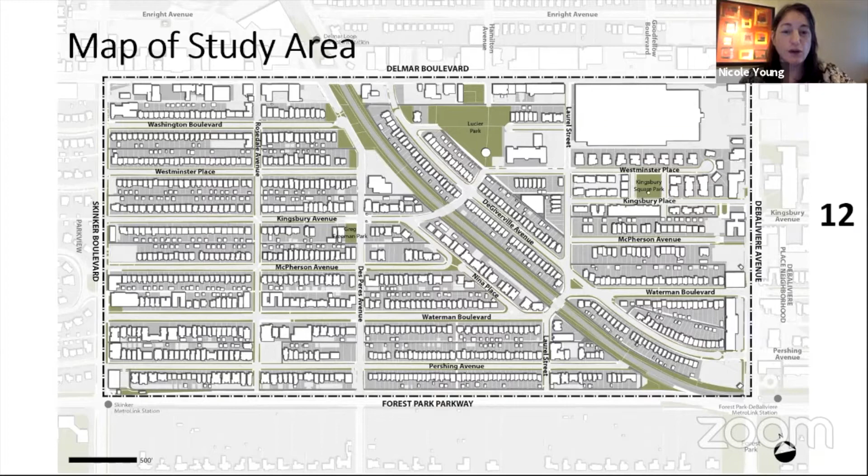As Mike said, there were over 400 comments, so on the next slide we can show you how those were distributed. It's so great that we got so many comments. You'll start to see pictures of the neighborhood as the presentation goes on. Our team here today really spent quite a bit of time walking through the neighborhood, getting to understand it, and really getting a feeling of how things are functioning on a day-to-day basis.

So Mike, do you want to go ahead and start talking about these maps we've prepared? Sure. Taking all those comments, over 400 distributed across the neighborhood, we started to look at where we had those hot spots and where issues started rising to the top. The first thing we looked at was safety and mobility — that's number one. And what really rises to the top is along Waterman Boulevard.

That is definitely a corridor that has a lot of speeding issues. This is also where we have multiple four-way stop signs, controlled intersections, and we definitely have a lack of compliance at those. The other big route is DeBaliviere Avenue going north and south through the neighborhood — it's a very wide street, and it lends itself to speeding, and that's typically what happens.

We definitely see that. Some of the other issues relate to how certain one-way streets and street closures are configured — based on the comments we received, people get in there and maybe get lost, not knowing which way to get out of the neighborhood, and will either go the wrong way on a street. When they do that, unfortunately, they try to get out as fast as they can, which leads them to speed to get out. So we end up with some speeding issues on those one-way streets because of that.

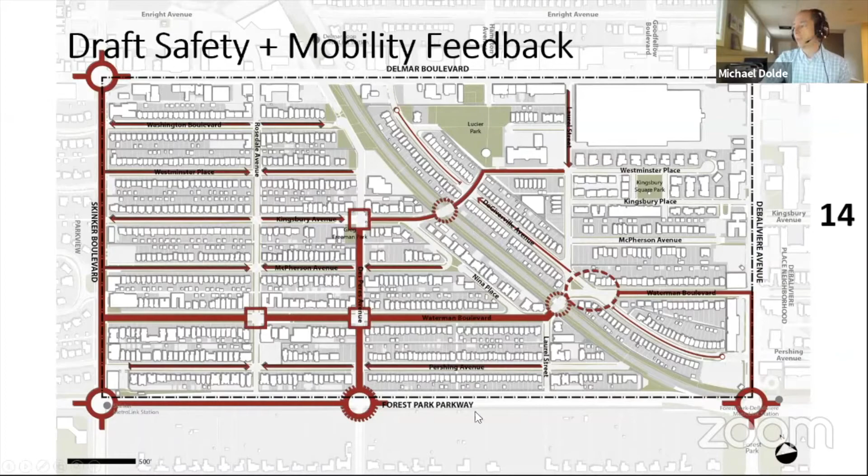So we all went out and walked the neighborhood, took these comments, and wanted to verify them and observe it for ourselves. They were almost all spot on.

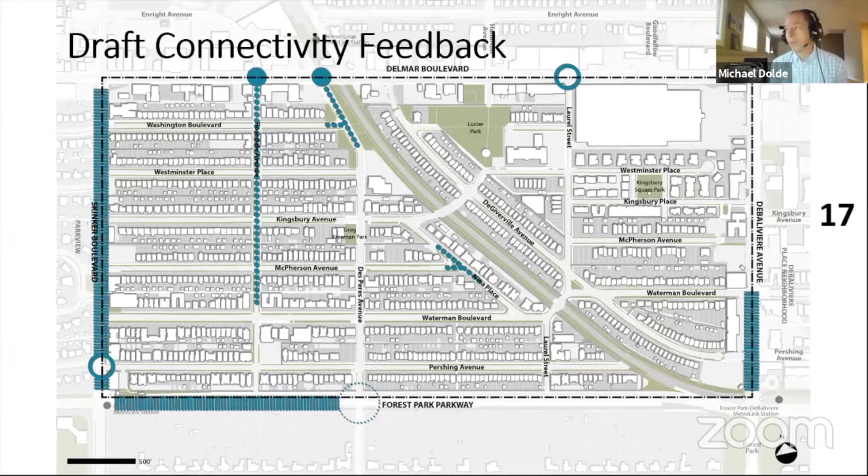One of the other things that rose to the top in the comments - and this is something we didn't actually ask for in the Metroquest survey, but people volunteered the information - was about the connectivity of some of the streets that had been closed in the past. It's something we're going to discuss a little later in the presentation, but most of it revolved around the streets across Rosedale that are currently closed for through traffic. Then there's a few other locations where either we don't have access out to Delmar, or we have some one-way streets that prevent connectivity to either side of the neighborhood.

We did ask about parking and loading. We didn't have as many comments as we expected when it came to parking and loading, but we did have some specific locations. This tended to be more down on the southern portion along Pershing. Some of this is due to the retail at Skinker and Forest Park, and also it's closer to Washington University, so you get some of those day parkers. Some people may not be parking on campus and may come over here to park on the street, and we end up with some specific issues on those streets when it comes to parking.

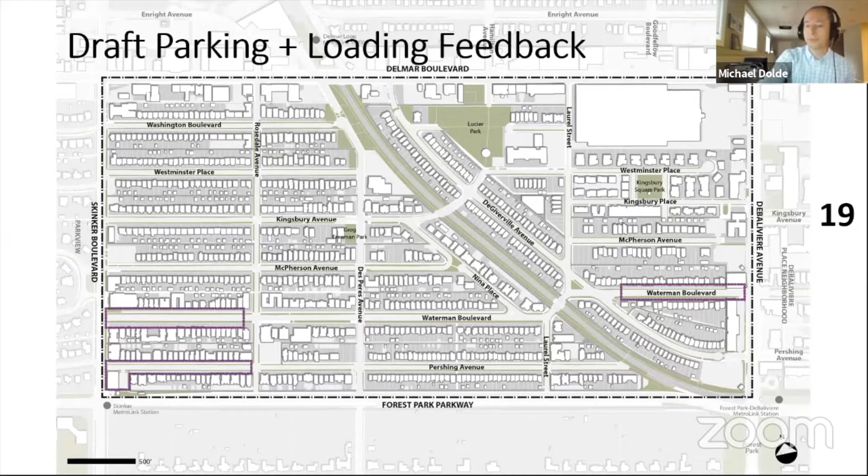We also have some issues with lighting. Some areas either have lighting that may be blocked, or we don't have pedestrian scale lighting for people walking. So it might be good if you're driving in a car, but if you're walking, you may not have well lit intersections to feel safe crossing, or even from a personal security standpoint.

So starting to put all this together, we're starting to come up with some composite maps of what the existing issues are, and kind of overlaying that on top of each other to see where we can have opportunities.

Nicole: So now we're going to talk through some of the safety enhancements that we're considering for the neighborhood. There's a few categories of this. Most of these photos that you'll see in the next few slides are from other projects that have been implemented in the city of St. Louis. Each of the photos is associated with an address. We're really going to encourage you all to go out and see some of these after the presentation. And if you'd like to come back and give additional feedback through the Mentimeter, you're welcome to. We will have this on the website so you can come back and look at the addresses for each of these.

So we'll start off here with the intersection enhancements. The first one - Mike, if you can go to the next slide.

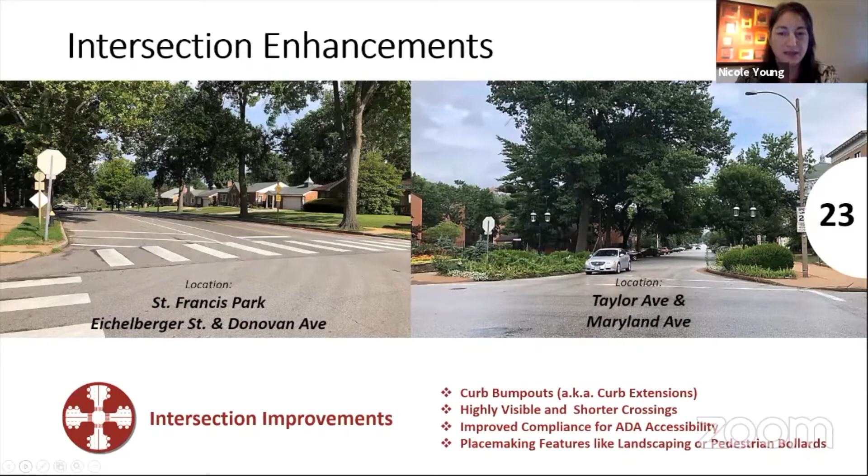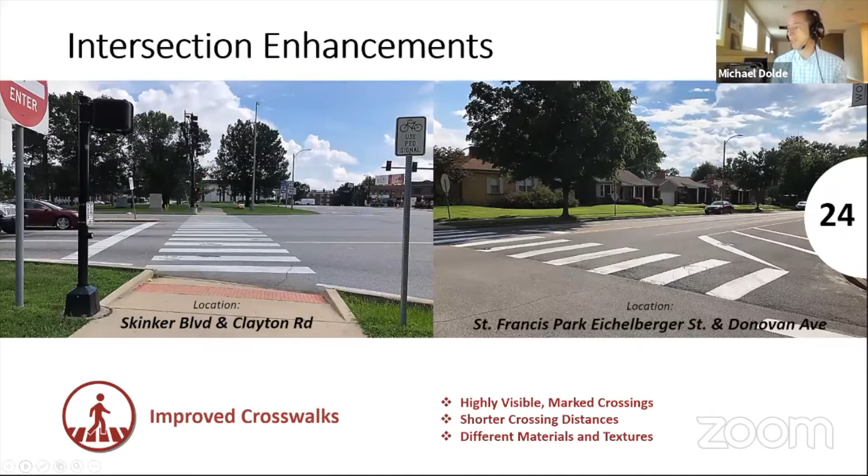So more of a neighborhood feel, but using that same type of striping. More intersection enhancements with improved lighting in the Shaw neighborhood, and also in Central West End. You'll see some of the different style of lighting that can provide more of a neighborhood feeling.

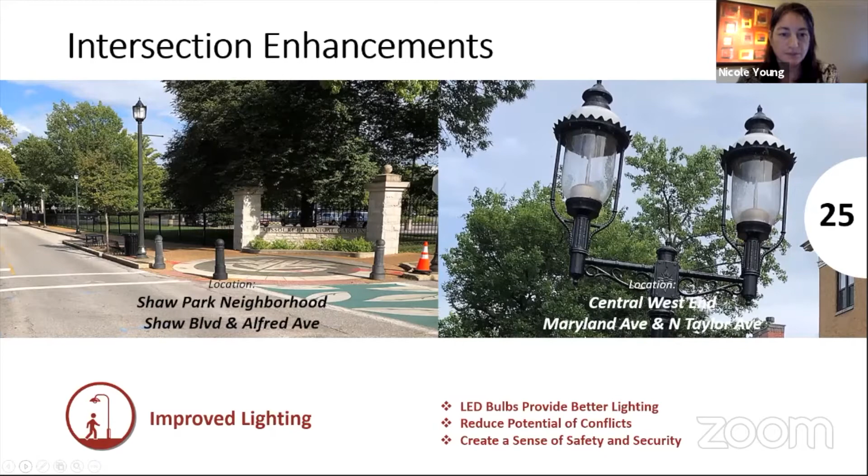As we move into the next segment, we call these mid-block enhancements. On the left here, you'll see a mid-block crossing that's located in Forest Park. That allows us to give the neighborhood more access points to cross the streets, helps to slow traffic, and really allows for a more controlled speed between the intersections.

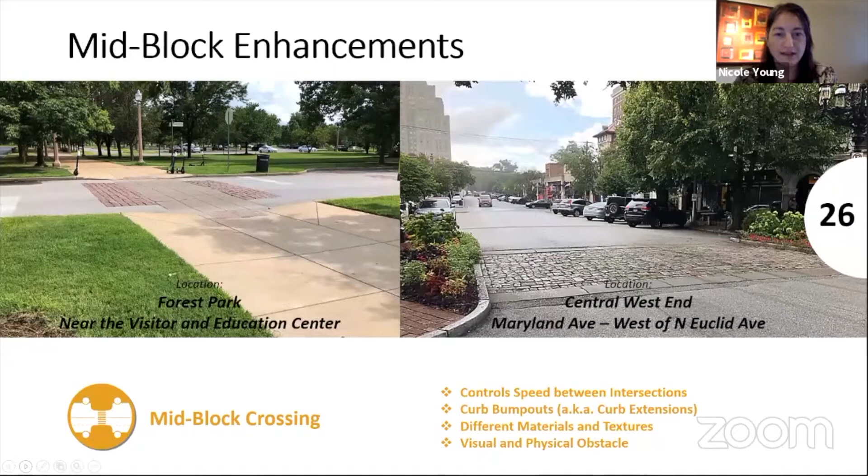On the right here, you'll see one that's in the Central West End. I think a lot of people know this location, just at Maryland and Euclid. Again, it provides a different material and texture, and provides a little more visual aesthetic to the crossing itself.

Sorry, I think my feed is running a little slow here, but a couple more photos in Tower Grove. The left one is on Connecticut, just west of Grand. The right photo here is Tower Grove South at Oletha at Lucy Street. These are both speed humps.

We know there have been a lot of questions about speed bumps versus speed humps in St. Louis. We are not allowed to have speed bumps because of the snow plows, so we really try to utilize these speed humps that have a wider profile to control speed between the intersections. It just provides that obstacle to reduce speeds and gives the visual cue to drivers to slow down.

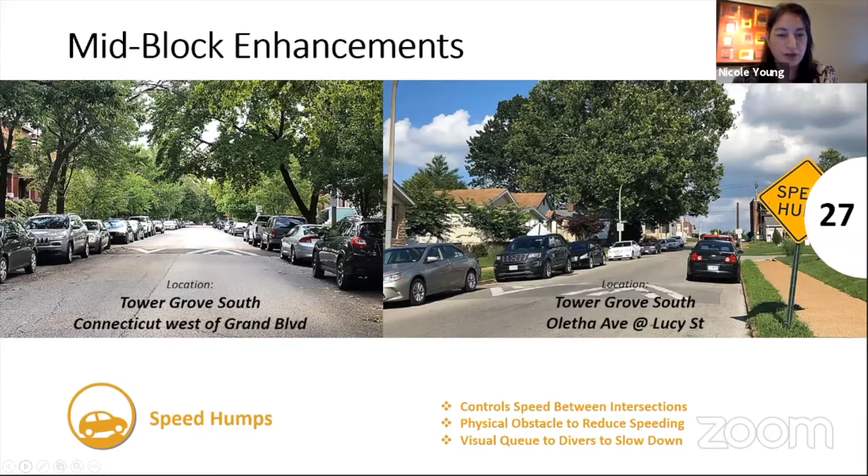I know the word road diet tends to frighten some people, but really what we've seen in providing some road diets in St. Louis is that it doesn't impede the flow of traffic, but does improve the safety quite a bit. It slows cars down, but allows them to get through the intersection faster, actually, by narrowing those lanes of travel, and it actually shortens the crossing.

So it additionally helps to prioritize other modes of traffic, such as pedestrians and bikes. Mike, did you want to talk about that a little bit more?

Sure. By having the curbs brought in, when we say road diet, it's a narrower road, especially at intersections, and that makes the crosswalk shorter. So that's less exposure for someone that's crossing the street. It would take less time for them to cross, it's less distance, and it allows us to have more of a highly visible crosswalk. It's a visual cue—as you come to an intersection, if it's narrowed, you're more likely to see visually that it is an intersection and that you do have crosswalks.

So as Nicole mentioned, it's safer all around, but definitely for pedestrians with that shorter crossing, that's less exposure out in the middle of a street, especially for your most vulnerable users—your kids and elderly and anybody that just takes a little bit longer to get across.

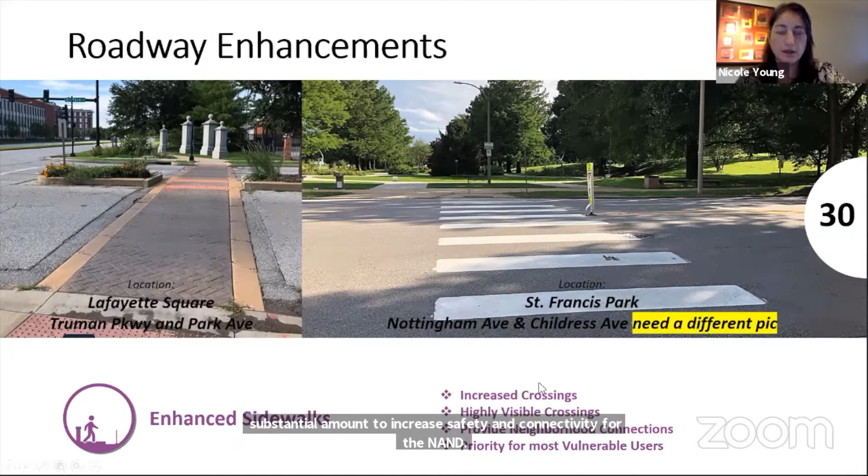These are just a couple, one shown in Lafayette Square and the other near St. Francis Park. St. Francis Park went through some crossing updates a couple of years ago, and they've really done a great job in that area. So we're using it as an example of something that's been implemented in St. Louis that you might be able to drive down and see, and how it might help improve the Skinker Debaliviere neighborhood.

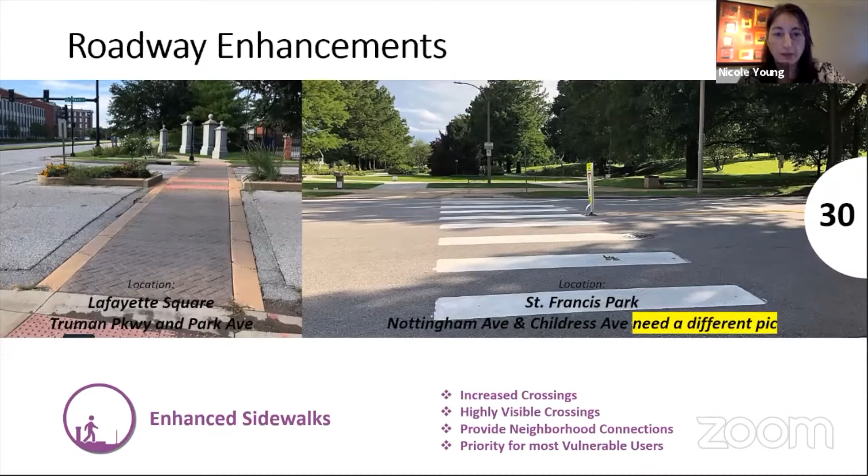And then gateway elements are something we've looked at to just improve the neighborhood feeling and establish the neighborhood entryways, to really provide that feeling of a place that has, as we said, walkability and access to transit and bike paths, that there's going to be people out walking about, and that we're going to expect you to slow down and really build that neighborhood brand and character that you all expect within Skinker Debaliviere.

And definitely, this is something that would probably be done after some of the more critical improvements we've talked about. But it is something that Nicole mentioned, that it's an entry into the neighborhood that gives you the sense you're entering a residential area. Anybody that lives along Waterman would know that it's used frequently as a cut-through street, maybe to avoid Forest Park Parkway or Delmar. So the purpose of the gateway elements would be to say this isn't just a cut-through, it's a residential neighborhood you're entering, more of a visual clue to try to bring down that speeding issue.

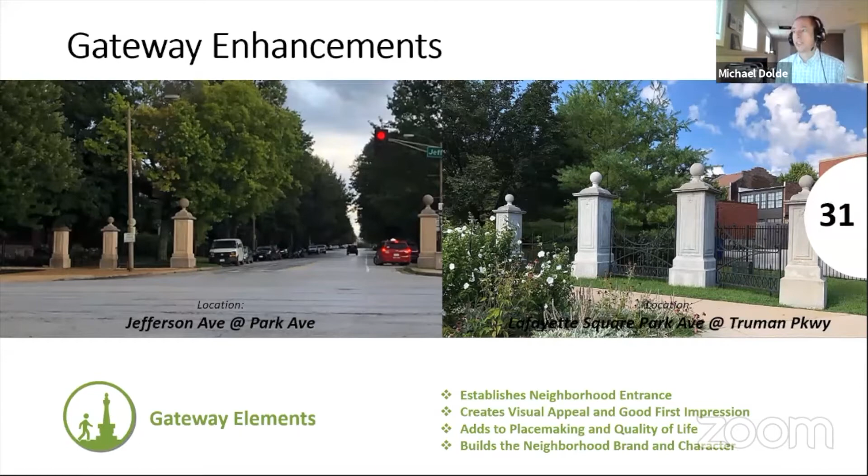Hey Mike, since you happen to be on the subject, one of the questions we have queued up here, a couple people have doubled down on it. The question is, how can you validate the hypothesis that speeding is a result of confused drivers trying to exit the neighborhood? This idea of a cut-through, is that a guess on your part, or do we have data to back that up, or how are we basing our decisions on that?

It's a good question. Most of that was based on comments we received along those streets, and it wasn't just one, it was definitely a grouping of comments from multiple respondents to the survey, and also just personal observation out there. If we do look further at improvements on those streets, the city would likely require us to collect speed data and use that data to back up the hypothesis. But that's a good question. For right now, it is somewhat of an anecdotal or subjective feel to it.

And this is the last enhancement that we'll talk about, the open access. After this, we are going to have some more polling about these options for improvements. Then Mike is going to talk about some locations where we're considering these, so you will actually see within Skinker Debaliviere where we're considering opening up access and putting in two-way conversions.

So we're going to show you some draft enhancements of locations of improvements, and after each one we're going to ask a couple questions. Hopefully everybody can start to get into that.

We're definitely looking at the neighborhood and looking through the comments and the areas of opportunities. Intersections is something that I think has the most area for opportunity and can provide the most impact when it comes to safety, especially when we talk about walking through the neighborhood and biking. Really where that comes into play is where we have those four-way stop signs. What we'd be looking at there is improved crosswalks, highly visible crosswalks, some spot lighting improvements, and also intersection improvements where maybe we narrow the roadway at the intersection to give that visual clue that it's an intersection, to increase compliance with coming to a full stop and yielding to pedestrians.

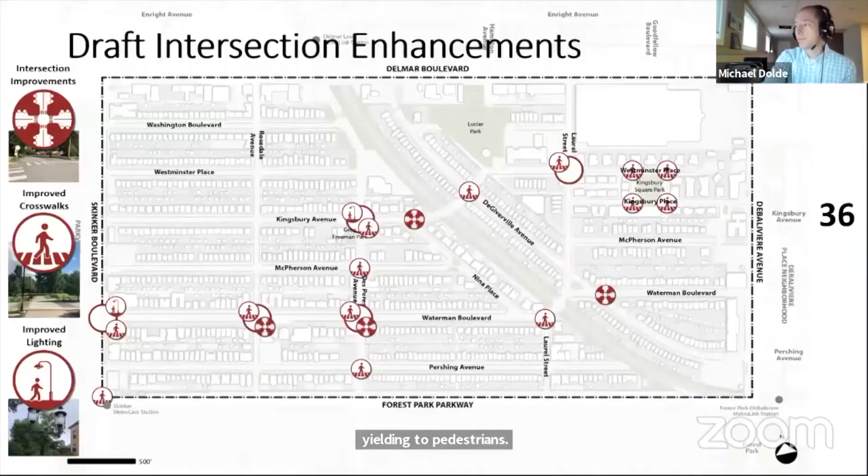So with this, we'll ask: based on the previous map, which I'll go back to in a second, rank how satisfied you are that the study is addressing the issues at the intersections. So based on this map, let me enable that question.

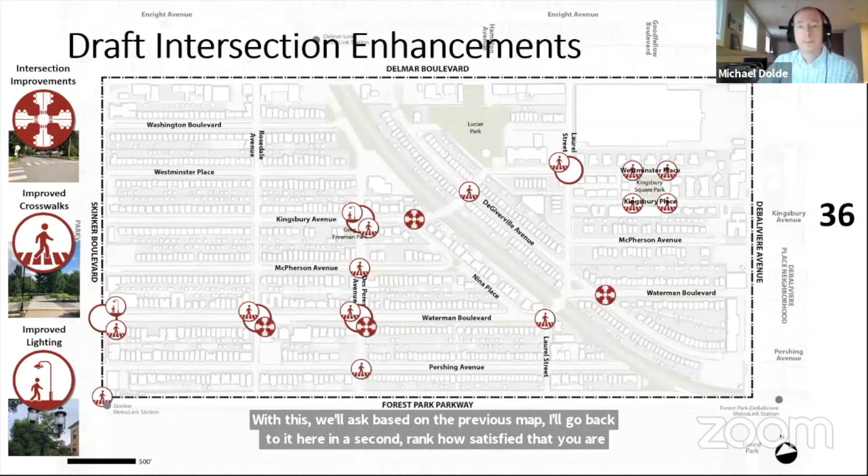So we're getting some responses on that—that's good. We'll give that a few seconds. I'll show you the next question.

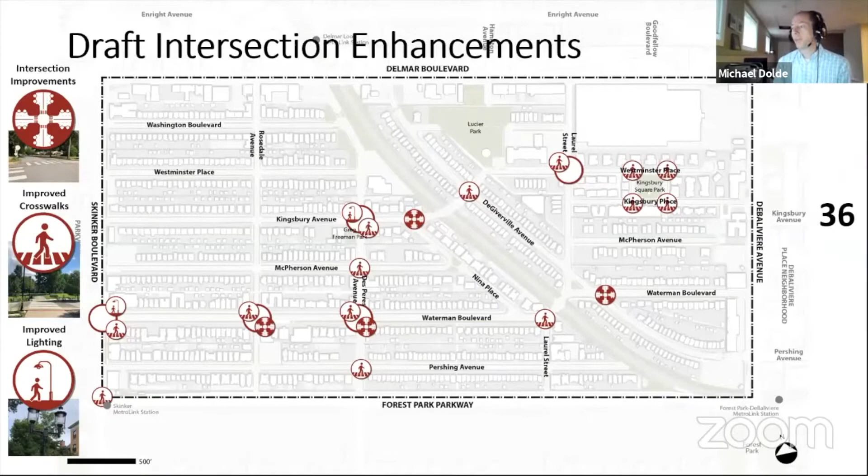Is there any recommendations regarding intersections you would like to add? Is there any intersections that you feel are not included on this map, or any other type of improvements at these intersections that you would like us to study and possibly recommend? It looks like we're getting a couple of responses on that one too—we'll just give that a few seconds for everybody to fill that in.

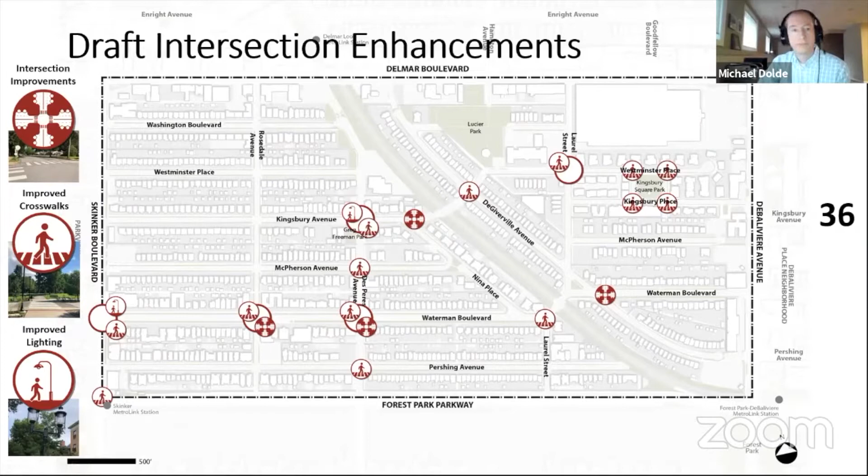Before we go there, I'll show real quick that we're getting some good responses, some different intersections, some people in agreement, some things we can add. Good feedback here, we definitely appreciate all of it.

Next, talking about the mid-block enhancements that Nicole had previously talked about. We definitely see the speeding issues along Waterman. Looking at those mid-block treatments, these could either be pedestrian crossings, because these are long blocks before you get to an intersection with a crosswalk, so either adding that mid-block crossing, or possibly at a minimum add a speed hump in the middle there.

The location between Skinker and Rosedale is a unique one. When we did our observations, that was torn up for a while with some utility work. That little construction zone actually acted as a natural mid-block enhancement as it slowed cars down as they traveled over it. So that's what we would be looking at for some of these improvements.

Other thing to mention on this one is on the one-way streets coming into the neighborhood with Westminster and McPherson. Our thought is, if the data shows the further need that needs to be studied, but include speed humps on the streets coming in, so that as people enter the neighborhood, they know this is a place where residents are concerned about speed. Put that speed hump to make sure they slow down.

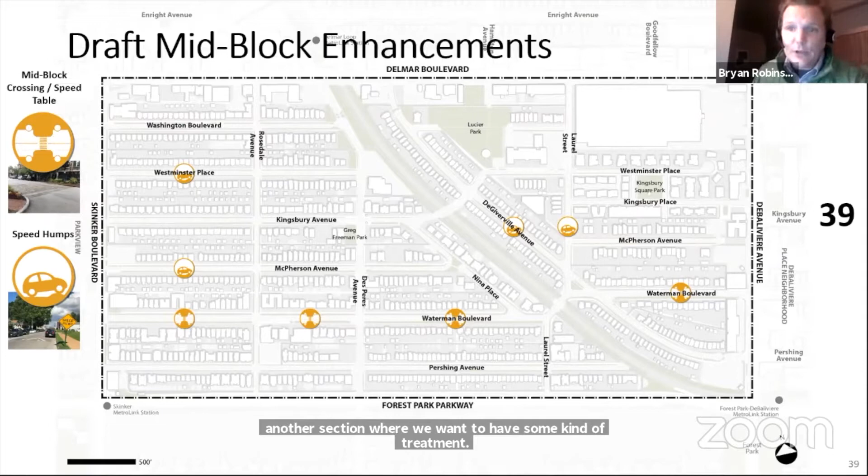Mike, I just want to interrupt since we're going through these tools. There was a question regarding the understanding of what an improved intersection included, and whether or not it included improved crosswalks. Yes, that would definitely be part of it. It could be separate, done first as just the improved crosswalk, or it could be done with additional intersection improvements where we talk about narrowing the roadway widths and doing some other treatments on the corners. But ultimately, the crosswalks is what would be one of the main focus points on that.

So next question, rank how satisfied you are with addressing the issues and concerns at the mid-blocks in the neighborhood, similar to the first question we asked. And then the next question would be, are there any recommendations, again, for those mid-block locations? We can fill out both of those.

Mike, do you want to go back to that map? I think it was helpful to have that up during the polling. Yes. And we're going to provide these maps again through the city's website. We know that during a public meeting like this, you get a quick glance at something and you may want to study it further, or look into your street, or a street where there's a concern. So we'll provide that afterwards too. But this is definitely beneficial, getting some of the feedback through the polling, and it looks like we're getting some good responses on that one too.

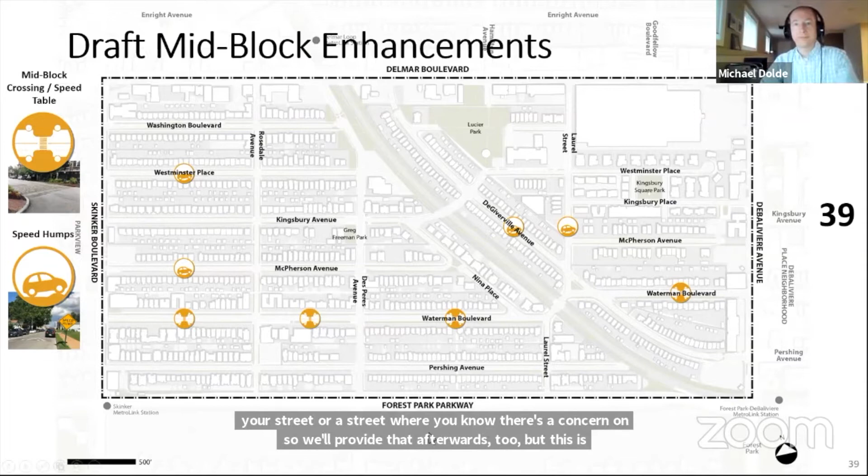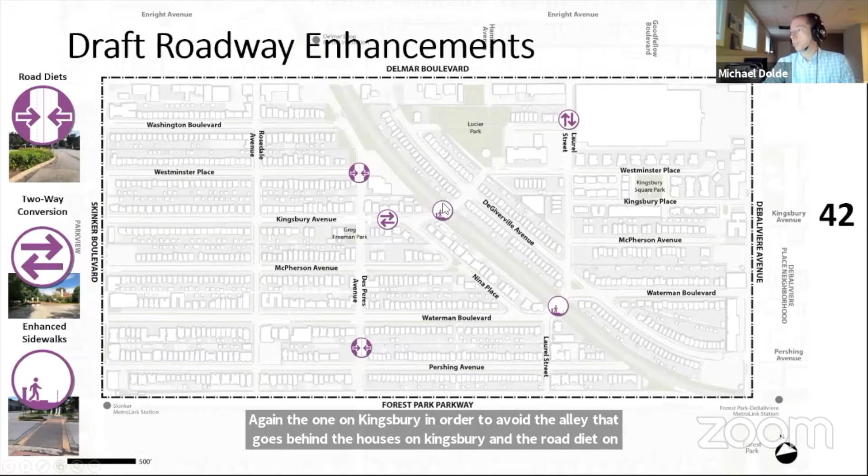Also looking at the bridge crossings with the MetroLink tracks that separate the neighborhood, improving those crossings so that it's an easy experience if you're walking or walking your family across those bridges, that you have that feeling of safety and that you're separated from vehicles.

We'll move to those questions. Same questions as before: how satisfied you are that we're addressing the right issues and concerns for those roadways, and are there any recommendations regarding roadways that you would like to add? I'll go back to that map here in a second.

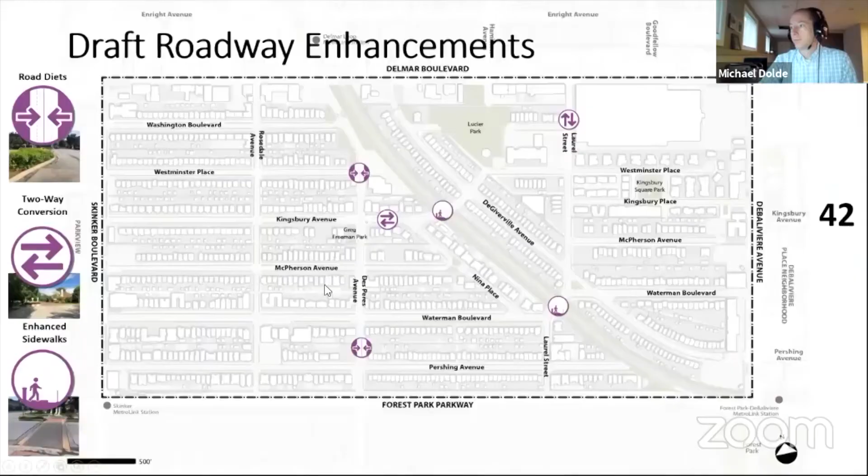The three we've mentioned so far, the intersections, the mid-block, and the roadway, those are really the top priority with the most impact for safety. The next couple we'll go through are somewhat secondary and complementary to these, but these would be the main focus as we look at a traffic study to improve safety throughout the neighborhood. We're getting some good feedback on those.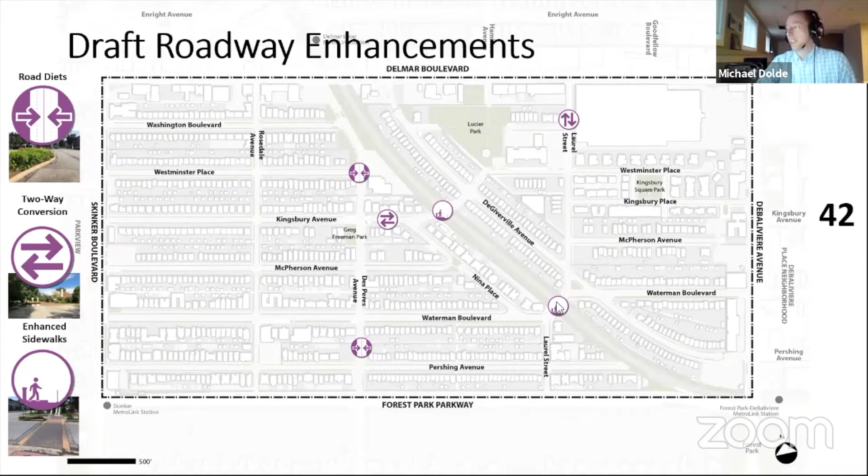I see one of the comments here about the Metrolink bridge at Hamilton, and we are working with BPS and the designer on that bridge to incorporate some of the same type of improvements, and I believe they've already got some of that in there of something we were going to recommend. So that's good to see, and it's something the city does take into account on most new projects, trying to incorporate that in. So one of our recommendations is when the Waterman Bridge gets replaced in the future, that they also do the same improvements that the Hamilton Bridge gets.

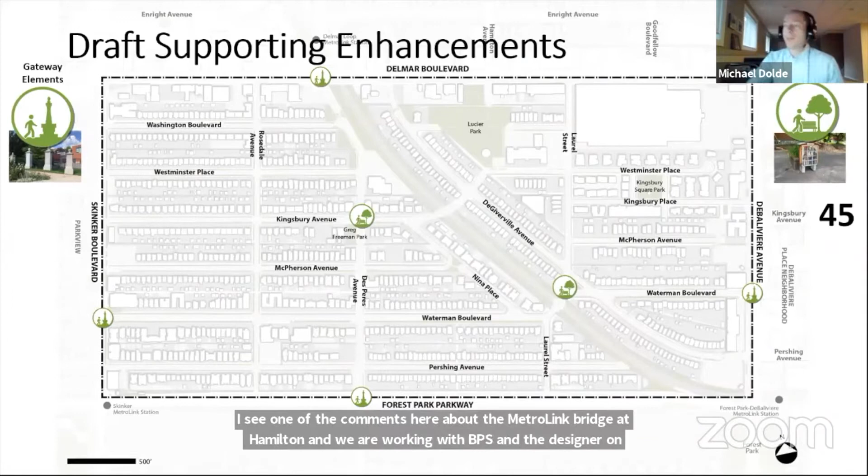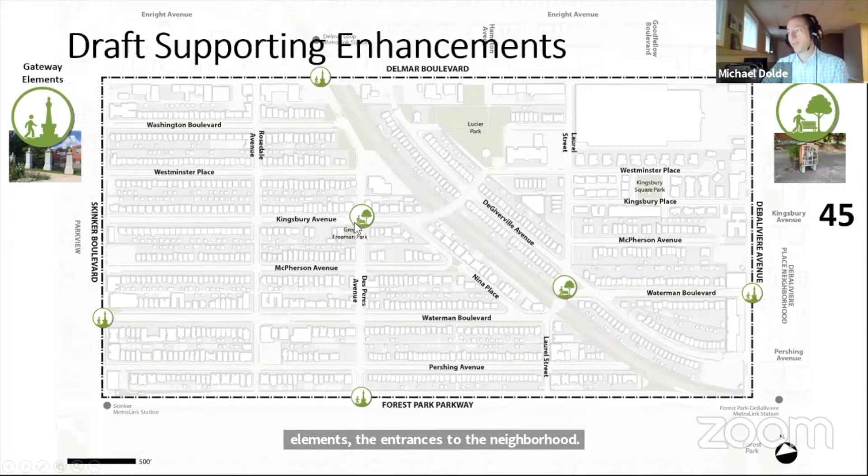Next we look at some of the supporting enhancements, talking about those gateway elements, those entrances to the neighborhood. One of the other things we've included on this map is somewhat of a gathering place, one of the big ones that came out was at Greg Freeman Park, or Four Corners Park, here at Des Peres and Kingsbury. That's not a very safe intersection to cross. We keep coming back to DeBaliviere being a wide road with a lot of speeding. If we can do something at that intersection, that also improves that park, and it's a great centrally located gathering place for residents in the neighborhood.

One of the other areas we'd be looking at, similar to that, is the triangle at Waterman, DeGiverville, and Laurel. Right now that triangle has some things, but you can't get out to it. It's not very safe to cross any of those streets to get out there. So looking at how we reconfigure that intersection, create something that is a gathering place and meeting place for friends and people walking to stop and talk to each other, while also supporting the idea of improving safety at that intersection. How does it play together hand in hand?

Looking at the same two questions here: rank your satisfaction with including those supporting enhancements to go along with the top three, which is the intersection, the roadway, and the mid-block treatments. And then is there any other recommendations or locations you'd like to add to our map?

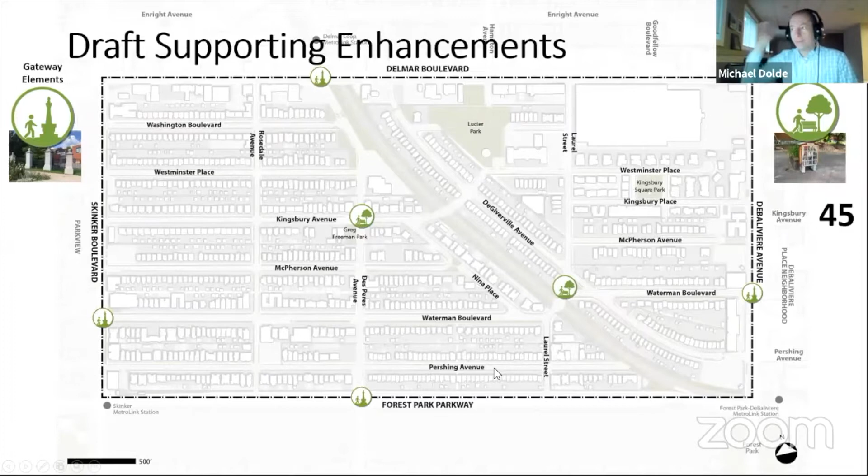All right, let's move on to connectivity. This is one that definitely, as we mentioned before, came out of that MetroQuest survey. People saying we should definitely be including this when we study traffic and safety throughout the neighborhood. They want the streets back open.

Obviously there's going to be pros and cons with that. That's something that needs to be discussed and studied further, but it's something we wanted to gauge tonight: do we want to keep studying that further? Specifically looking at the intersections along Rosedale, and including some connection out to Delmar at DeGiverville that's right now closed.

I would mention here at Westminster and Kingsbury, we know that right now that's gated off. We're not recommending opening that up to vehicles, but the initial recommendation would be to somehow open up that fencing to allow pedestrian access in and out of that section of the neighborhood. But obviously that is open for feedback.

And then there's another little section of Nina Place that's cut off that would be included in this. But when we talk about the gathering places and that kind of placemaking from the previous slides, we don't want to lose that if we recommend opening these up. So any improvements would include some type of feature to limit speeding. We don't want to create the issues we already have on other streets by opening these up. We also don't want to remove the gathering places and meeting places that we know people use. There's basketball hoops along some of these, we know kids play, so we wouldn't ever want to take that away just to open up vehicle access, but is there a way to create opportunities for both?

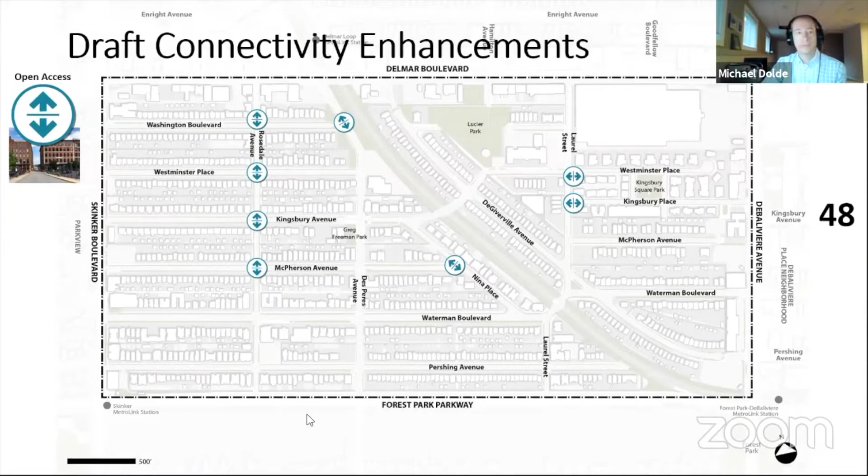This brings us to pulling it all together, looking at the neighborhood as a whole with all these improvements and different recommendations, and how it all works together to improve neighborhood safety. So we started to put together this draft composite map. This will obviously be updated as we take into account feedback on those specific locations, but we're trying to distribute improvements across the neighborhood to adequately address issues and make sure we don't push any issues to other streets from where they are now. That's definitely our goal.

I just opened up the question about the pilot project for the connectivity. Some people are just now filling that in, so give it a second before moving on to this next question.

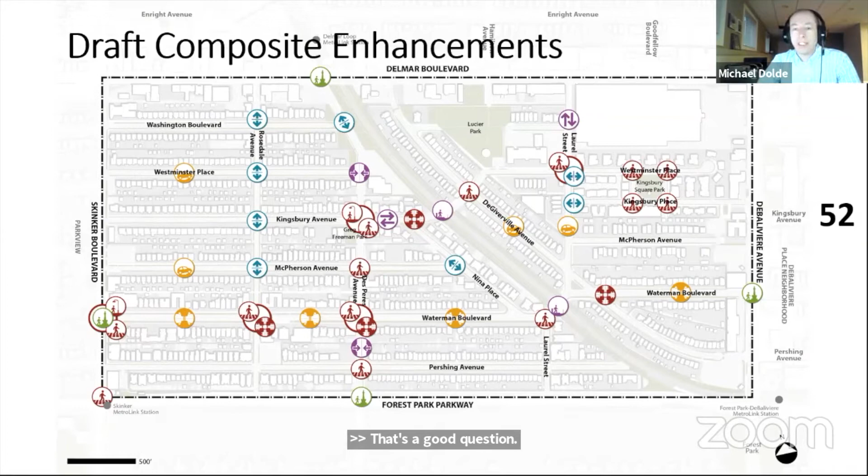I was wondering, is painting the pavement at all effective, or do you have to go to the expense of pouring concrete to make bump outs? That's a good question. As Nicole showed from Francis Park, they did a lot of their improvements with highly visible painted crosswalks, and that can be very effective as a short-term, low-cost improvement. You can do that and see how it works, and if everybody really likes it, you can always look in the future at going to that next step of bringing in curbs and making it narrower. But paint by itself can be very effective if used correctly, and we do have examples throughout the city where they've done that.

Okay, let's see, we have another one here from Tom and Kathy. Most of these streets are pretty narrow. How could two-way traffic happen without smashing into parked cars or people? Mike, I'm going to put you on the spot on that one.

That is part of what Nicole mentioned, that we would have to do some further study on some of those segments to make sure we have the proper width for two-way traffic. We don't want to encourage people to go down a street and end up scraping or damaging other cars, so that is a limiting factor. Some of the other roadways we looked at are pretty wide and can handle parking on both sides plus two-way traffic relatively easily, thinking about DeBaliviere Avenue as one. But the two-way conversion is somewhat limited to those specific locations, short blocks.

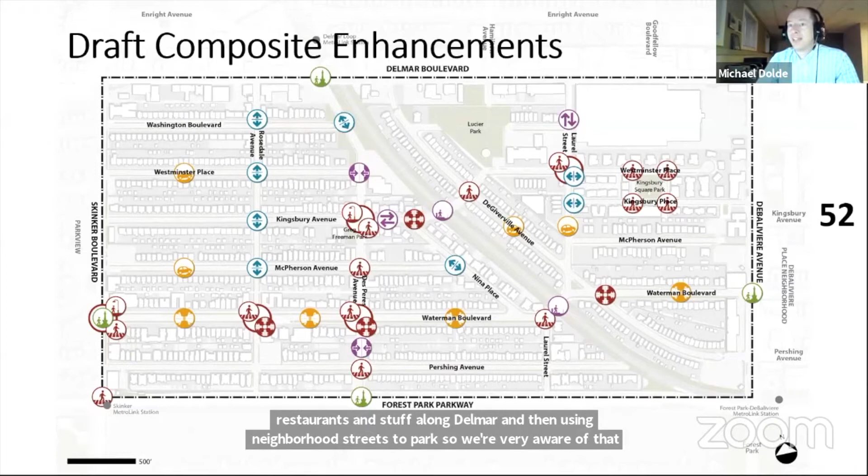And to go along with that, one of the things we're very aware of is that if either Rosedale or DeGiverville were opened up, you create the possibility of parking issues with people trying to use some of the entertainment facilities and restaurants along Delmar, then using neighborhood streets to park. So we're very aware of that issue. Through our MetroQuest survey, we didn't have a lot of comment on parking, but we know some of these improvements could lead to parking issues. So we're definitely trying to keep that in the forefront and make sure we alleviate that before it becomes a problem, or we don't want to create that problem.

So we have one more question queued up, Mike, about—and it's a little bit of a scoping question for you. Part of speeding going west on Waterman to Skinker is a 2-minute wait for a green light getting onto Skinker. So then when it is green, people speed to make the green. Can someone review the signals, please? And maybe it's a bit of what our purview is here and what we can impact.

Sure, and I can tell you that the signal timing along there has been studied many times, and the way that the coordination of the signals is set up along Skinker has in the past been set up so that people are able to get out of the neighborhood and at least store on Skinker before, if they're going southbound, to go through Forest Park Parkway. Definitely an issue with the intersection of Skinker and Forest Park Parkway. I think most of us know that intersection is over capacity. It has its own safety issues with pedestrians and bicycles, but from a vehicle perspective, it's definitely over capacity and has long queues that will sometimes, definitely in the peak hours, extend past Waterman, so that does create issues. So it's somewhat of a bigger issue, but it is a very valid concern.

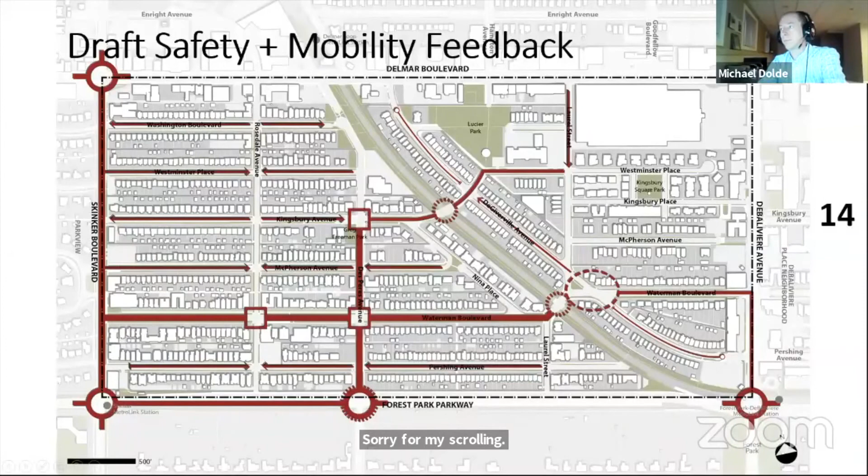And as you can see, along almost the entire stretch of Waterman, we have an overwhelming number of comments, and you can definitely see the groupings here. It's a little hard to see because there are so many comments, but the groupings here are really the intersections. This is Rosedale, and then a little bit to the east you see a grouping at Des Peres, and then another big grouping at that triangle intersection, and all the way over to DeBaliviere.

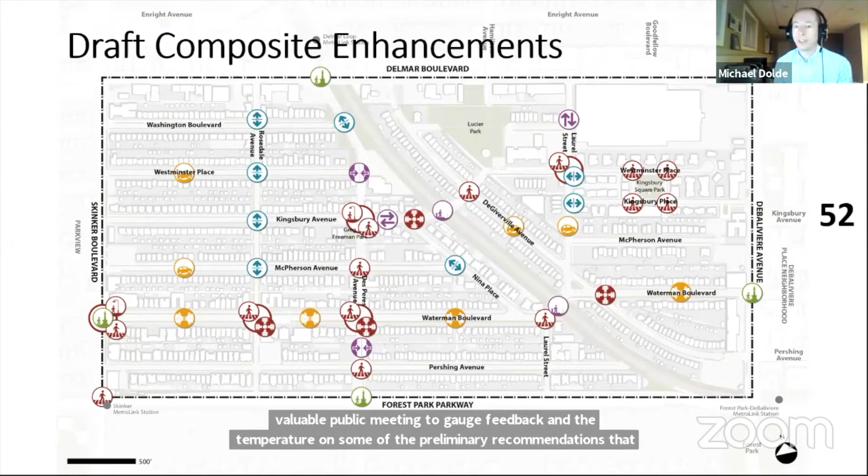Talking about next steps, this is a very valuable public meeting to gauge feedback and the temperature on some of the preliminary recommendations and draft improvements that we're proposing. Those will be put into a report submitted to the city, ranking and prioritizing them as short-term or long-term improvements based on which ones will have the most impact on improving safety and improving the speeding issues we've seen. So that will be coming soon.

The Mentimeter also has a final question at the very end, if there's any questions. So over the next two weeks, if you come back, or if somebody new takes it, they'll be able to provide questions through that platform.

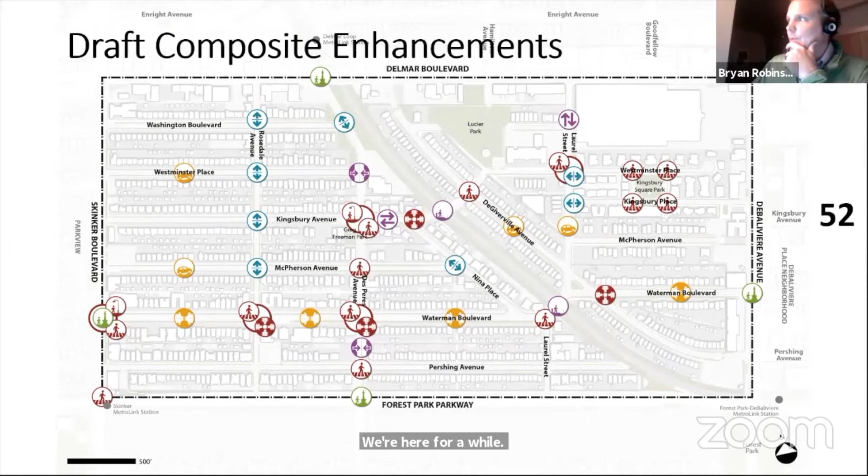Hello? Yes, do street trees help calm traffic, and should we redouble our efforts to put them where they're missing? I think absolutely street trees have the ability to do it. Dollar for dollar, or for impact, street trees reduce the speed that cars move quite a bit. It makes them feel like they're somewhere, and they want to slow down almost purely because of that in a lot of cases. In terms of what we've been asked specifically to look at, we've been looking a bit more at the roadway and street improvements themselves, but there is actually quite a good canopy generally, though there's probably some missing teeth for street trees here as well.

Yeah, there definitely are some missing near the bridge on Laurel. Letting us know that, sure, this would be great. So if you want to, on the Menti, put in specific locations where you're missing trees, that'd be great.

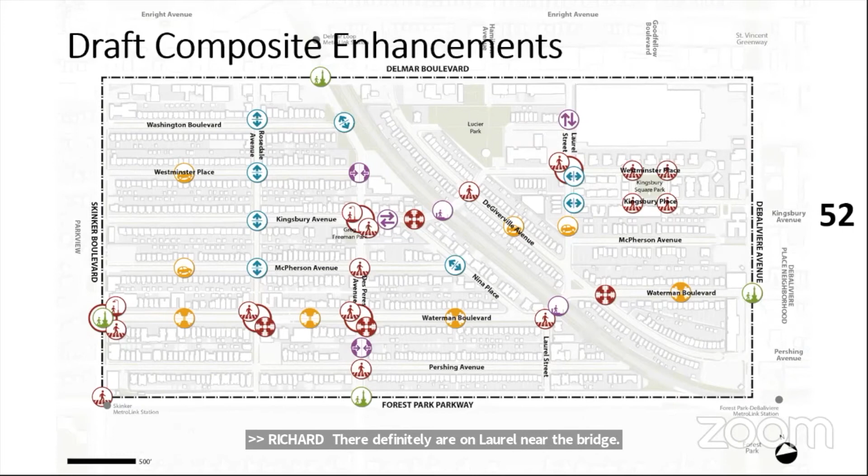Yeah, maybe that's more directed at the Alderwomen. I understand the process—a property owner has to ask for one, am I right about that? Can you ask that one more time, Richard? That a property owner has to request a street tree, they don't just put them in as they please, am I correct about that? This is more, I guess, directed at the Alderwomen than you all.

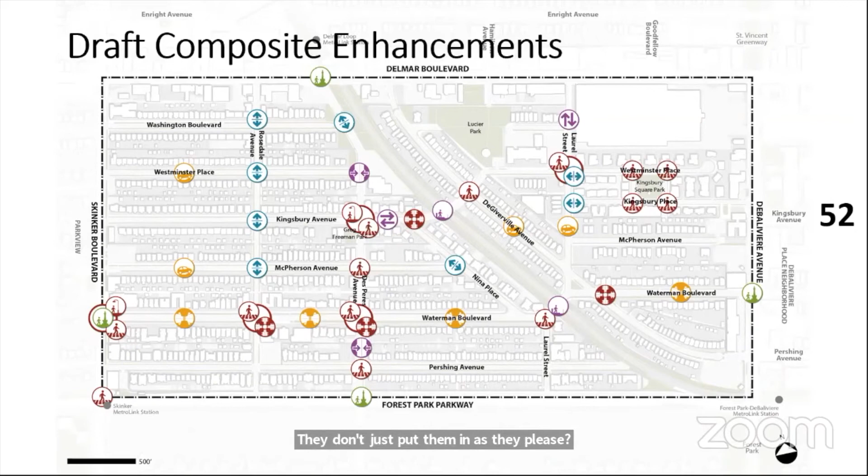Yes, generally somebody has to make a request, but that's not the only way. I've worked with forestry, and sometimes forestry will suggest, hey, these are places we've removed trees in the last several years, so we have some gaps, do you want to go ahead and replace those? So there's a couple of different ways it can happen, and that's something we could look at—go back to the neighborhood plan, identify gaps, and work with neighbors to select trees and locations. I think that would be a great idea. Thanks, Richard.

We also have a question here, and I just lost it—it went somewhere. Thank you for the presentation, I know there's more work to be done. How soon could we realistically expect to see improvements physically take place, and what would the process be to get to those improvements?

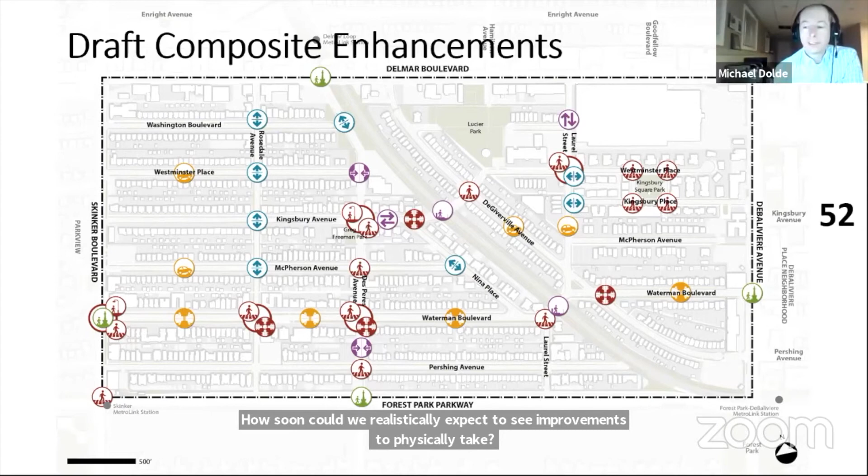Just to add on to what I was mentioning about our next steps, obviously we're trying to get that into a report that gives the city and the Alderwomen something to work from. For our process, that's another few weeks to get that done. Then it's helping to identify what those costs are for either short-term or long-term improvements, and trying to identify where those funds could come from, depending on the type of improvement or the magnitude and size of them.

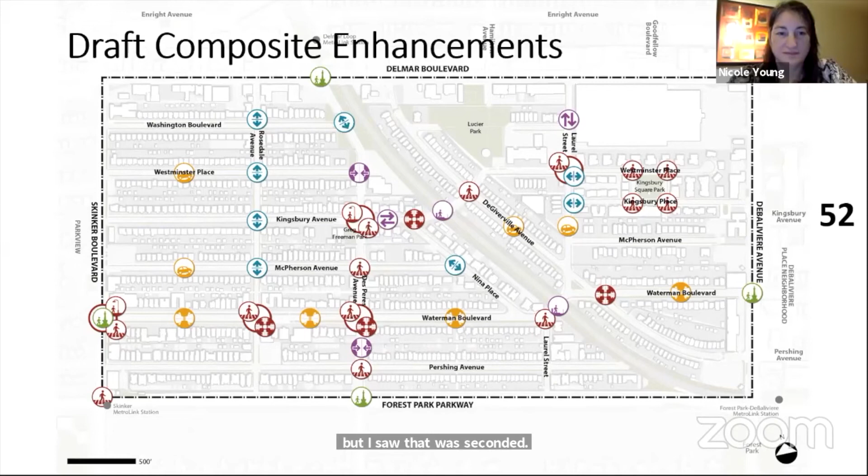From my perspective, I think it's probably up to the neighborhood community council or to residents, but if it's something people feel strongly about and there are champions for it, it definitely can't hurt. It can maybe be that first step of answering an issue, especially after we have our report, so somebody can refer back to it and say this has been studied before, here's what was recommended, here's maybe the cost for improvements to address something that comes up from residents. So that's kind of my feeling, it definitely can't hurt, but you need a champion for it and to follow it through.

So there is a neighborhood development committee, which is what prompted this, I guess that committee identifying the priorities in the neighborhood plan. I don't know if anybody from that committee is still on, but that's probably a good place to start. There's already an active group that has regular meetings and is following through. I'll make sure they're aware of this and some of the other issues that have come up tonight as well. They've been very helpful for us throughout this process too, relaying specific concerns.

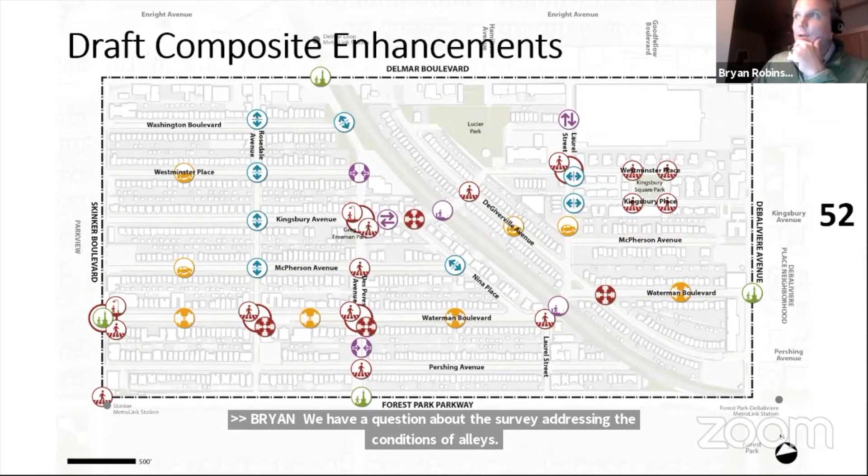We have a question about the survey addressing the conditions of alleys. I'm just passing these right on to you, Mike. Sure, and I just want to mention that the correct address is now posted.

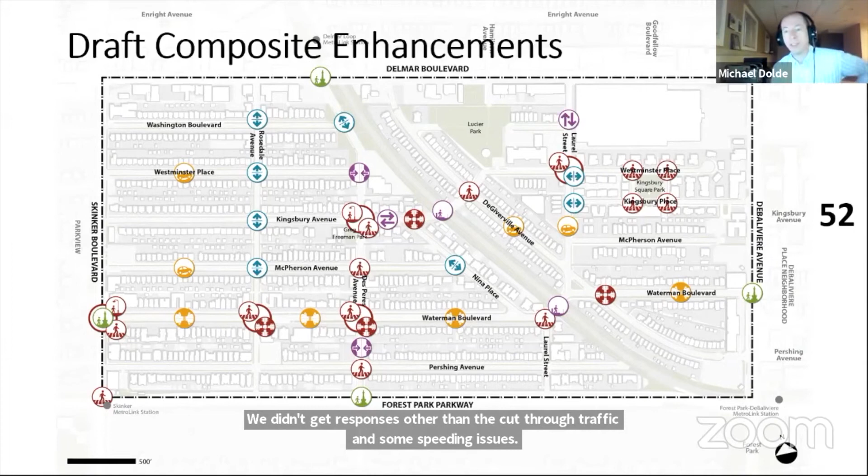Sorry Brian, what was the question about alleys? Does this survey address the conditions of alleys? Not directly. We have considered alleyways, and we did ask about them in the MetroQuest survey. We didn't get many responses other than some cut-through traffic or speeding issues. I think somewhat of the common thought is if you pave and make alleys really nice, it encourages people to use them and drive a little faster down them. But ultimately, the condition of the pavement or the alley itself is more of a citywide issue. One specific location we looked at is where an alley enters a more major street - if there's a pedestrian crossing, is it safe? Could somebody come out of an alley and hit someone in a crosswalk? That's more the focus of our study.

You all see Nicole Blumner's question about any other examples of reopening streets. I think there'd probably be a lot of folks interested in that one. Absolutely. So Mike, we have a question about the team's experience with reopening closed streets in other neighborhoods and what the result was like.

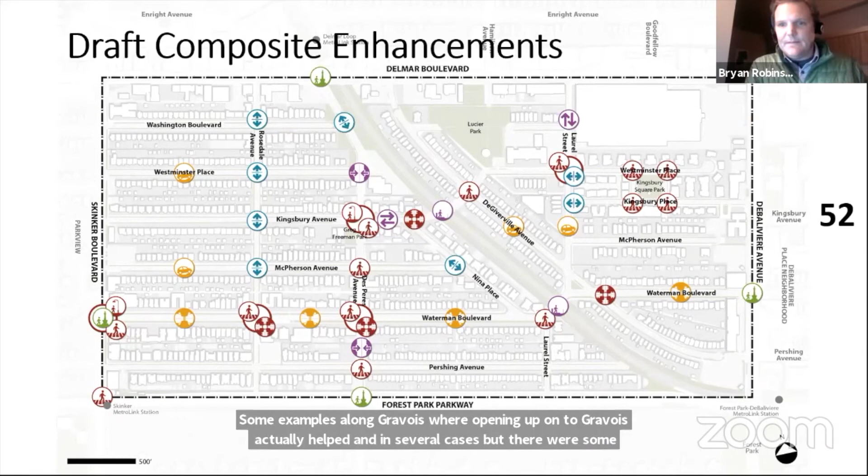And I think when we talk about opening, as we mentioned before, it's opening to local traffic. We're not opening so more people can cut through the neighborhood. That's definitely not something we'd be trying to encourage, since that would lead to that type of problem. So that's why I think Laclede's Landing is an interesting example to look at, but it's clearly a commercial district where they're trying to get more commercial traffic in there. Sure, that's not what we're looking for here. We want connectivity, but not an increase in traffic.

Yeah, and that one we did use because I had worked on it, and one component of it did reduce some of the confusion of how you get back into some of those streets. But I agree, it's not a residential neighborhood, so it's not as much of an apples-to-apples comparison. We do have a question here too that maybe relates to that.

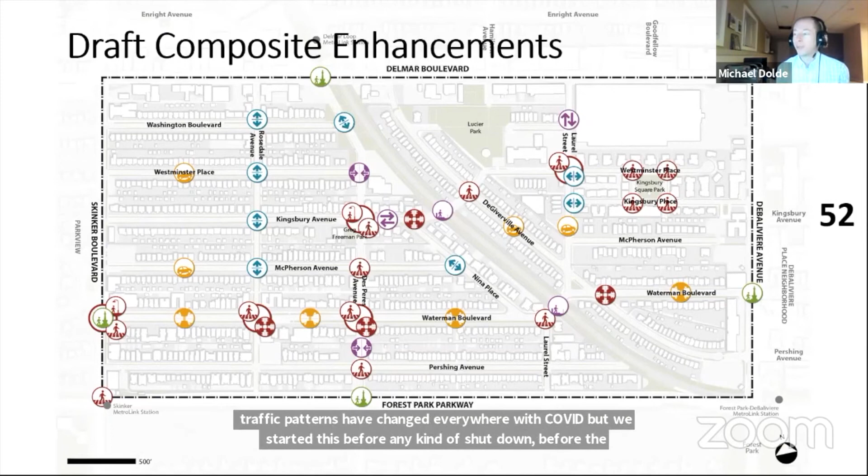My only thought is possibly people avoiding some congestion on either Skinker or Forest Park Parkway, if there has been an increase recently. I think obviously with COVID, a lot of traffic patterns everywhere have changed, but we started this before any kind of shutdown due to the pandemic, so we did get to see some of this before that. I think like anything, it's probably problems that were there before and maybe not as noticeable, but they just incrementally get worse until enough people notice, or enough people actually come out and say something. And maybe that was, in this case, we had some champions for it finally.

I'm not sure, yeah. I'd certainly add that since I first moved to St. Louis in 2002 or 2003, if I'm not mistaken, the entire other half of the loop going east did not exist. There was the pageant and there was nothing between. So certainly, I think the good development and revitalization of the loop itself has contributed to more people wanting to be there and park there, which no doubt has pushed some cars into the neighborhood trying to park.

A lot of neighborhoods have other good models for managing that, like parking districts, which protect the neighbors' rights to park. The struggle between the commercial district and the neighborhood is classic, like a cat and dog relationship. From my perspective as the urban designer, they both need each other - the neighborhood really needs a commercial district, and the commercial district needs the neighbors to walk over and spend their money. So it's how you design it and make it work right, which is a challenge.

But I think the eastern half of the loop, since 2002, is just totally different. That's a good point.

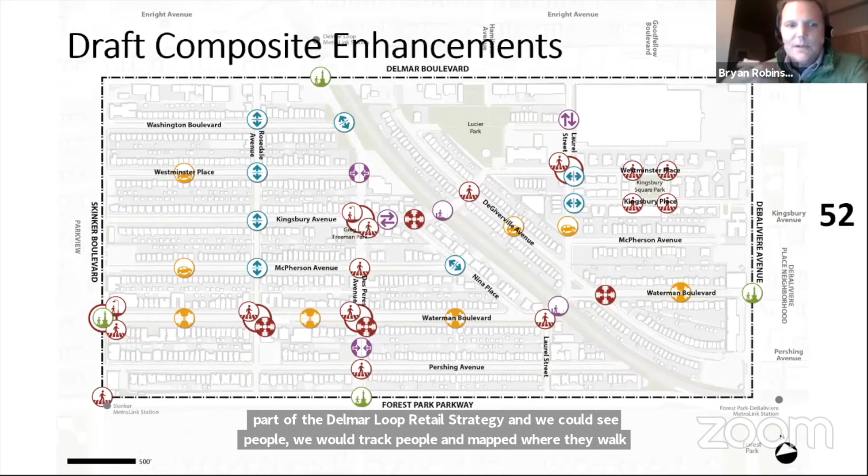So just worlds apart. About 10 years ago we did a public space, public life survey of the Loop as part of the Delmar Loop retail strategy. We could track people and map where they walked - we'd see them walk toward Skinker going east, and they would stop and turn around and go back. Now people are flooding across both streets because it's almost becoming seamless. The intersection's not ideal, but that whole half of the loop has changed so much. I'm sure residents who've lived there a long time have a better perspective than we do.

There's a question here, Mike. If you open Debaliviere and Rosedale as you suggest, how do you limit traffic to local only? Are there methods we can use to make it local only?

I think first, you open one or the other - you don't open both. We most likely are leaning towards Debaliviere as being the better option, because while the whole neighborhood is residential, Rosedale is very much going right into the houses there, whereas Debaliviere is a little bit more of a major street, a bigger street than Rosedale.

But I think you can do some things at that entryway to not make it look like you can get all the way through, when maybe you can. You can definitely make it constricted right there with how wide the road is, do some gateway elements, that kind of thing, to make it look like it's only open access to the neighborhood, so you may not know that you can go all the way through. There are a couple things you can do, but ultimately public streets are public, and it's hard to limit local versus through traffic.

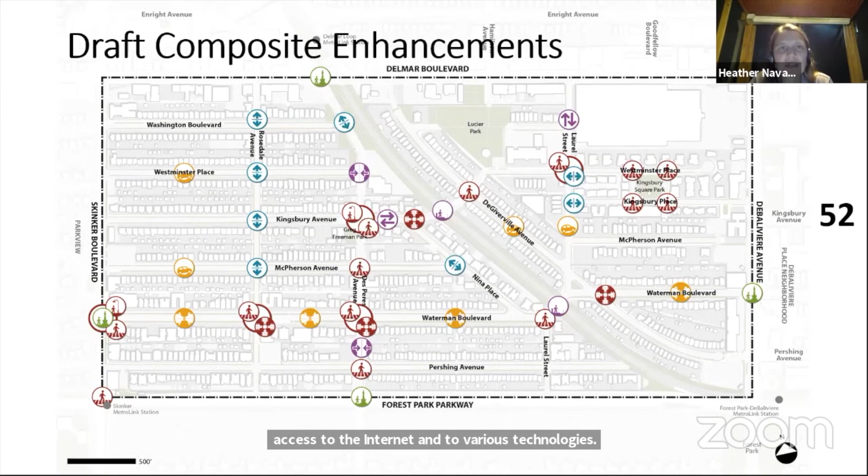Could I jump in with one last question? Sure, and I'm curious to hear from the people still on the call. In terms of how you heard about the meeting, especially with COVID, we tried different ways, knowing people have differing access to the internet and various technologies. If there's anything else we could have done to help get out the word, or if you know other people interested in knowing about this, please let me know. We've tried flyering in the past, put up signs - I don't know if the signs were helpful this time, but I'd love any feedback. Leave it in the chat, or email me, text me - just want to keep neighbors engaged, and I'm always open to new ways too.

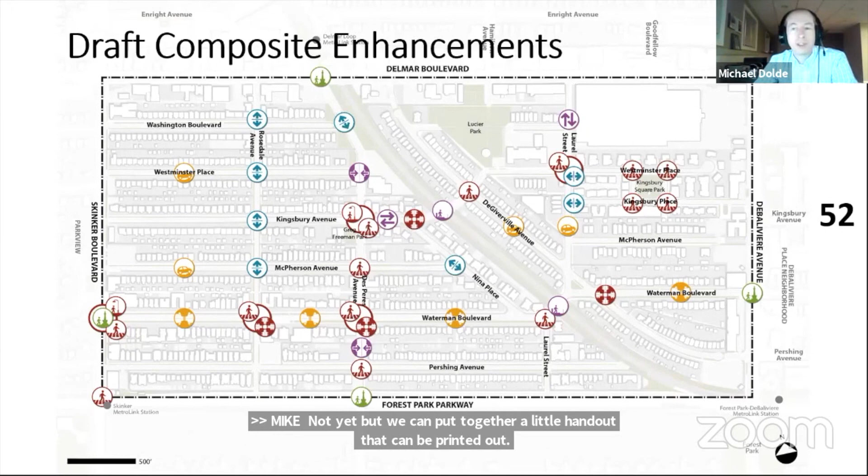One of the things we had started to put together was those examples from other places in the city of similar improvements that have been implemented, with the address or location, so that people, if they wanted to go drive or view it, they could. So we'll have that along with some of the composite map I'm showing right now. We can provide that to you.

Well, looks like we're at 8 o'clock, and I don't see any last minute questions getting snuck in. So do we want to call it a night?

Nice job. Yeah, thank you. And we'll share the Mentimeter results with you and Shamim, and I think it's kind of impressive to see how much feedback was given.

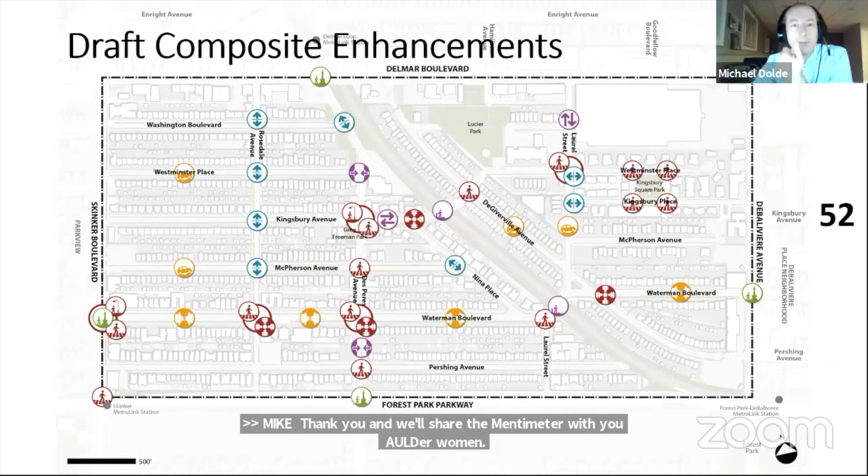Yep. And just looking through some of these, we're asking about satisfaction, if we have addressed them. I think most of them were to the positive side. But I think the big thing will be going back and looking at those locations or comments that people left, and we'll try to summarize those like we did the comments with the MetroQuest survey, so it's digestible.

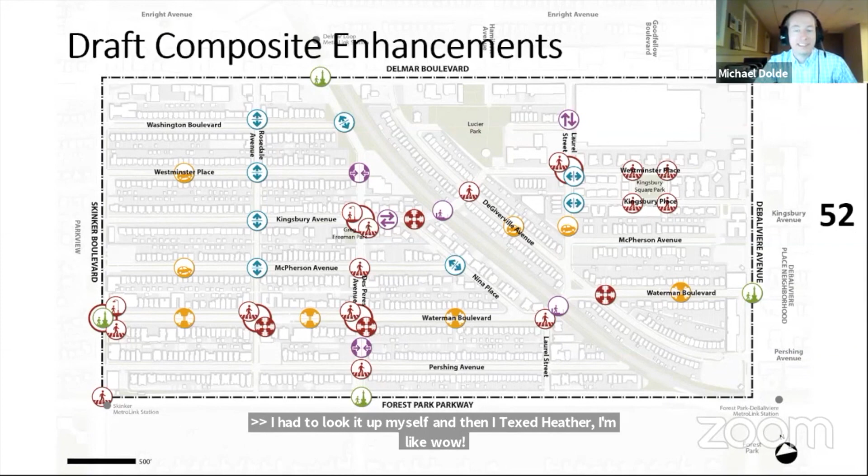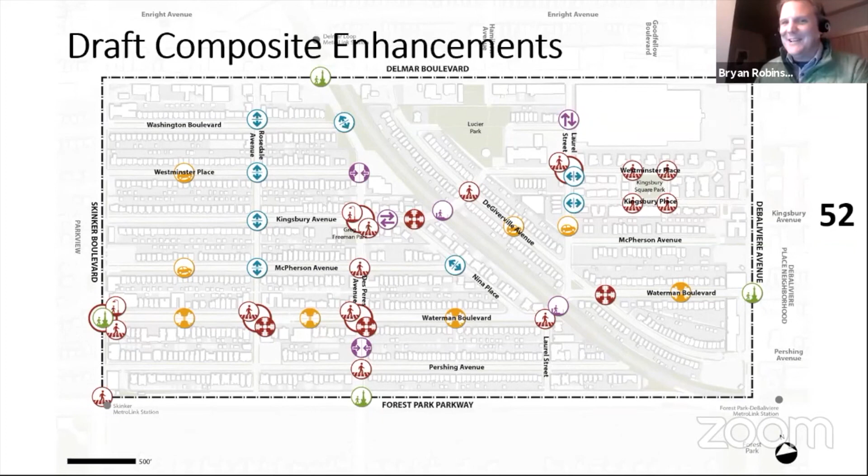That's cool if we could get something like that. I mean, we would definitely be the first in the city, I'm sure. See if the street department buys off on something. Part of me feels like I'd be out there a lot of times trying to touch it, and I don't know if that's, there's a little bit of a conflict in there, but it's pretty cool. They're pretty cool. Yeah, they look cool. I looked them up, they look really cool.

All right, I'm gonna stop sharing, and appreciate everybody's time tonight and helping get the word out. I think, like Bryan said, we had good attendance.